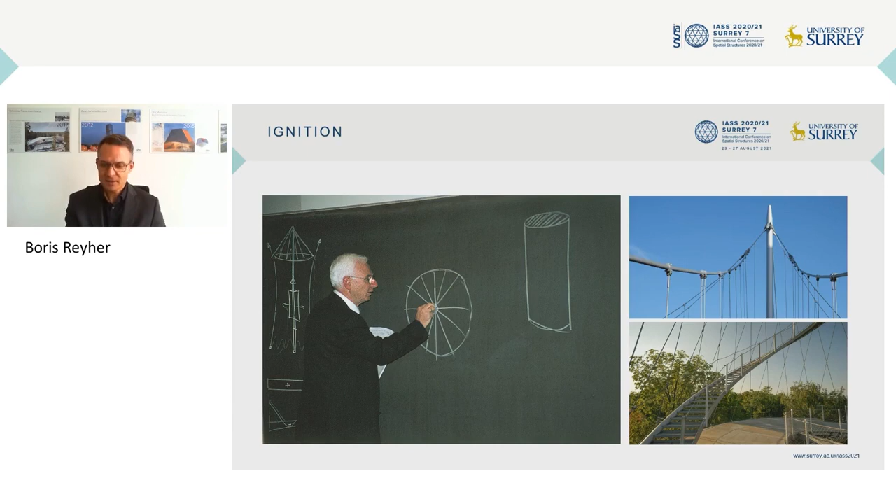And if you look at the sheer dimensions and the sheer amount of innovations and unknown solutions at the beginning of this project, that were novel concepts for structural detailing, novel ways to calculate and design such tensile structures in these unparalleled dimensions at the time, this is really breathtaking, and I think it's a very good example of, as I said, how courage and creativity can bring about great results.

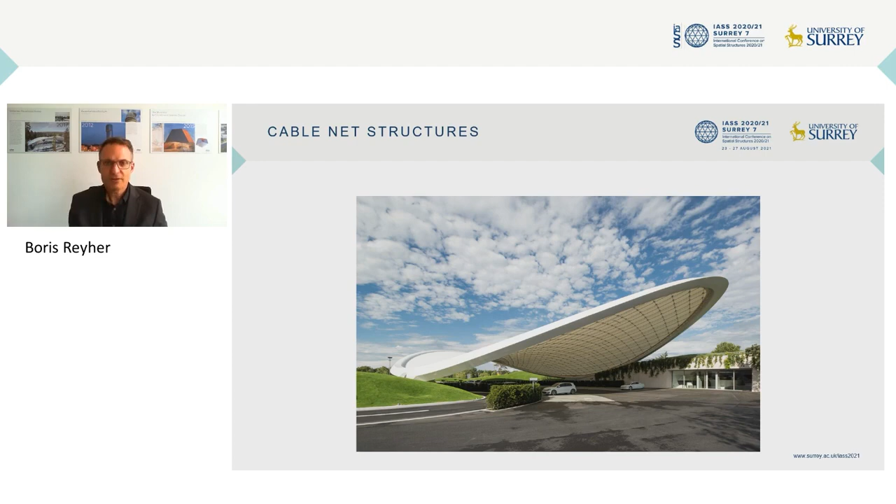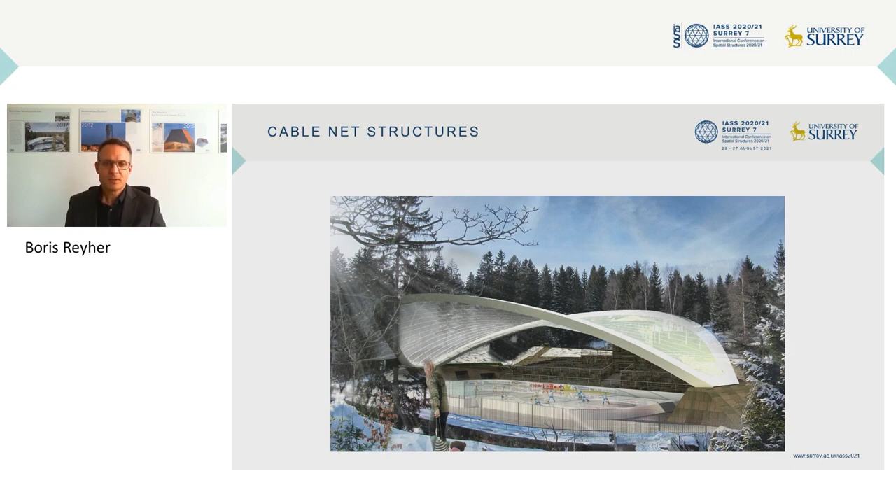And in the following year, we had the opportunity to work on a competition together with architects Graft. And here we also applied a similar principle, but with a bit bigger dimension. So here we were certainly inspired by the predecessors, by the example of the Raleigh Arena. However, the boundary conditions were a bit different here.

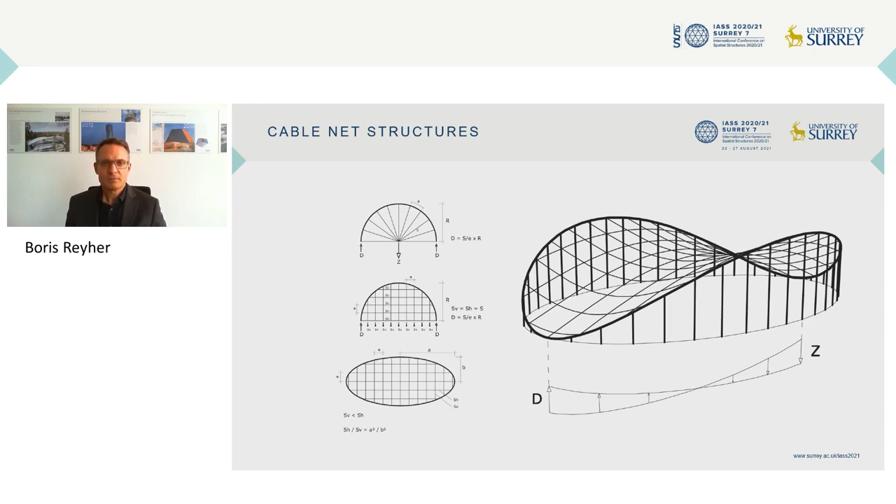So first we sat down and studied how these orthogonal cable nets work when you have different shapes of edge girders to attain a bending moment-free edge girder. And then, of course, when you go into 3 dimensions, how do the push and pull forces work if you have a continuous column around the perimeter.

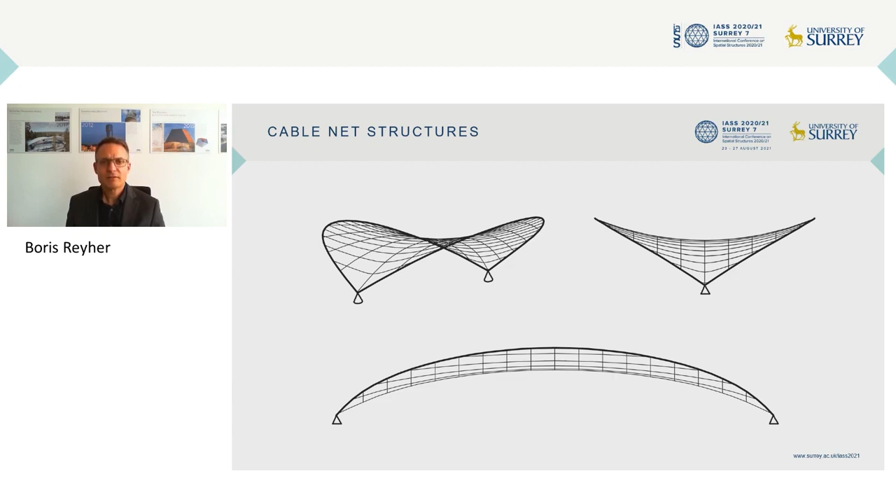But in this project, it was a bit different. We wanted to have a completely freestanding structure with only 2 supports at the ends and a span of about 80 meters. So we had to go into a bit more studies to get this all working efficiently and effectively with a bending moment-free edge girder.

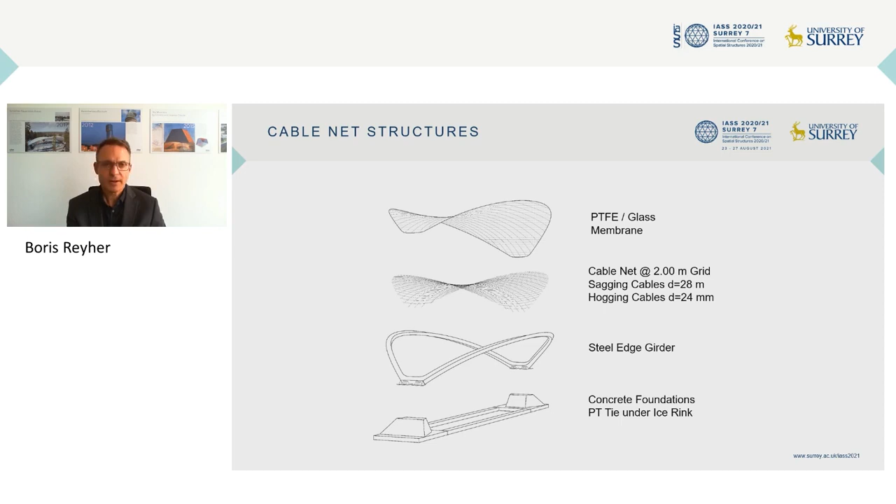And what we ended up with was the system of a cable net that was pre-stressed against a steel edge girder in a spatially curved form, and then a PTFE membrane that is basically lying on the cable net. And then underground, of course, you have some abutments and some PT ties to connect the horizontal thrust under the ground.

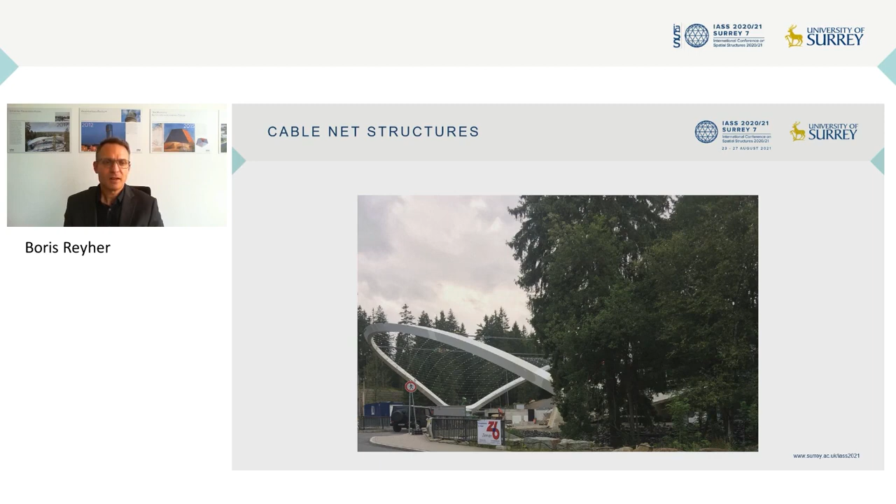So then the steel structure came up, and you can see this expressive geometric form, which is, of course, a result of the structural form finding more than architecture. And then the other thing, of course, is getting the details right to come out with a really convincing overall result. So a very clean solution also for all the little parts where, for example, all the cables are joining with the edge girder.

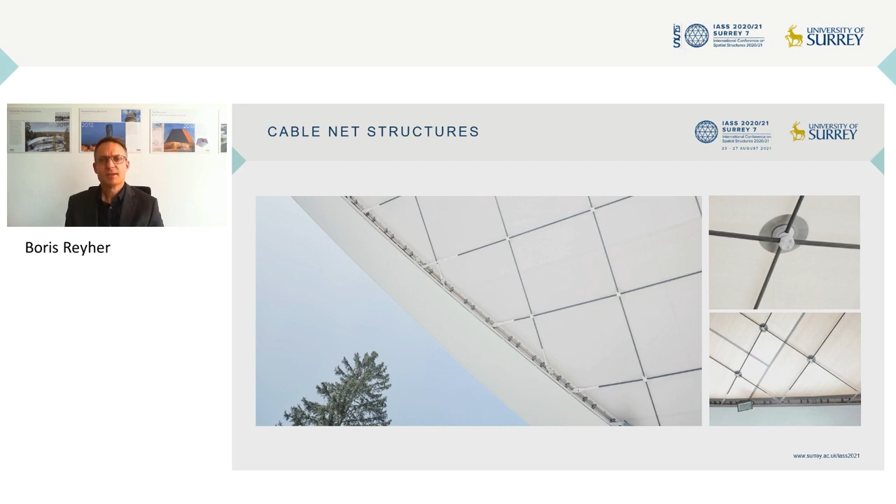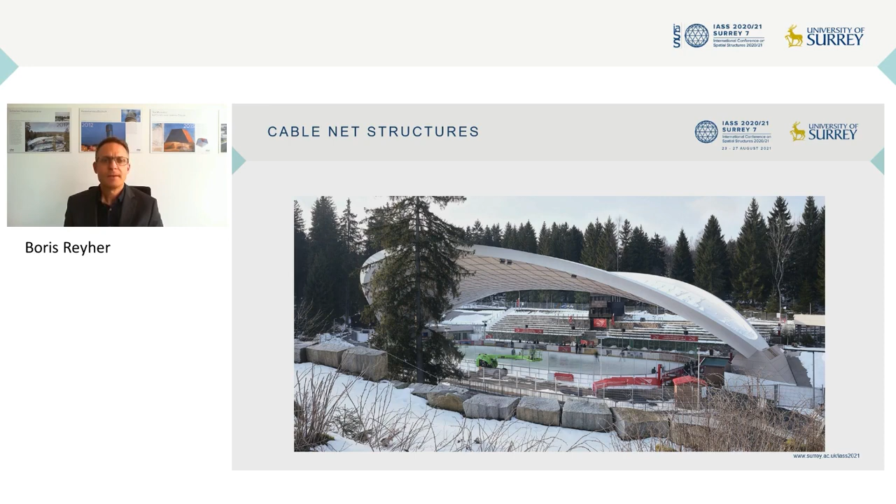A nice and clean cable node between the membrane and the cable network, and even down to the welds between the membrane patches, that they would properly align with everything else. And I think it can be said that the result is pleasant and is giving new life to the existing ice rink that it's covering. During day and during night and all around the year now, this historic ice rink location has been transformed into a venue for all sorts of sports and leisure activities.

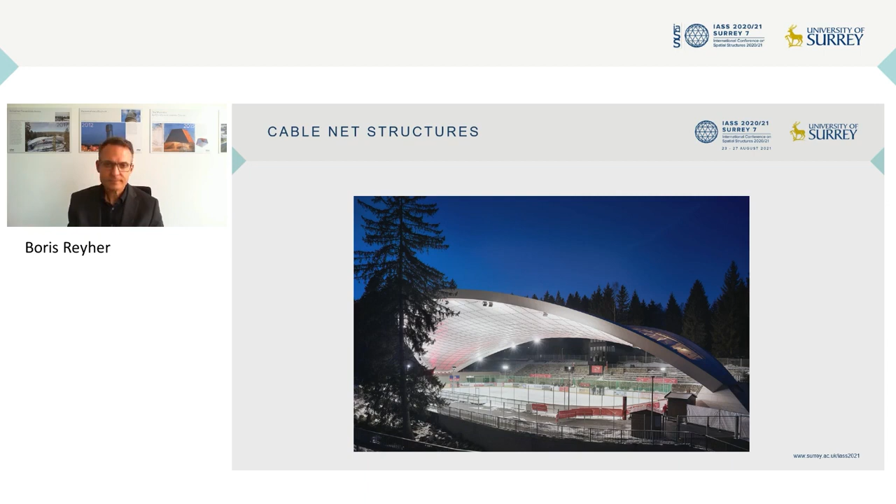Another quick example I want to give is about compression shells. And I was quite pleased yesterday when I heard Marijke Mollaert's keynote, and she was talking about how physical modeling for form finding is still important today. And this fits very well with my little presentation here of this project of a footbridge in Ditzingen in southern Germany, where we started thinking about structural form.

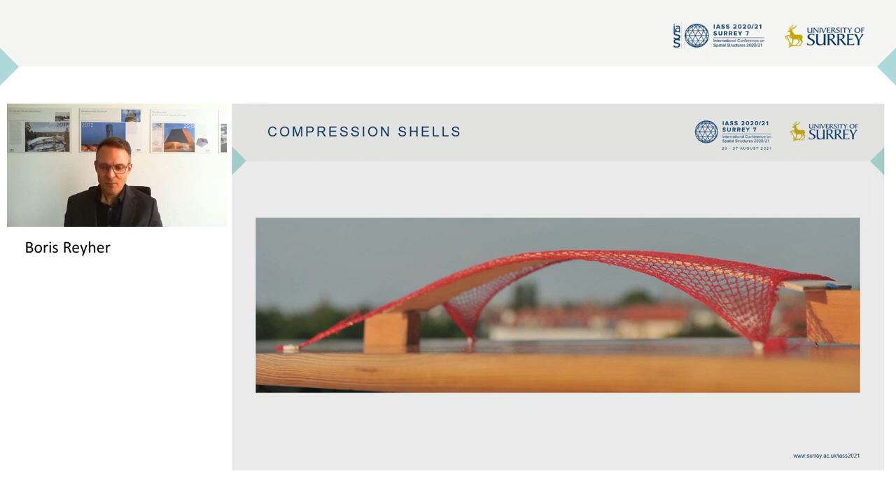And Mike Schlaich was one summer evening sitting on his terrace and playing around with this orange net, you know, this plastic net where you can buy your oranges at the supermarket. And he was, with the means that he had at his home, playing around with the form finding, actually for a very thin compression shell, which ended up a 20 millimeter stainless steel plate, doubly curved, and with some reinforcement around the edges, some stiffness.

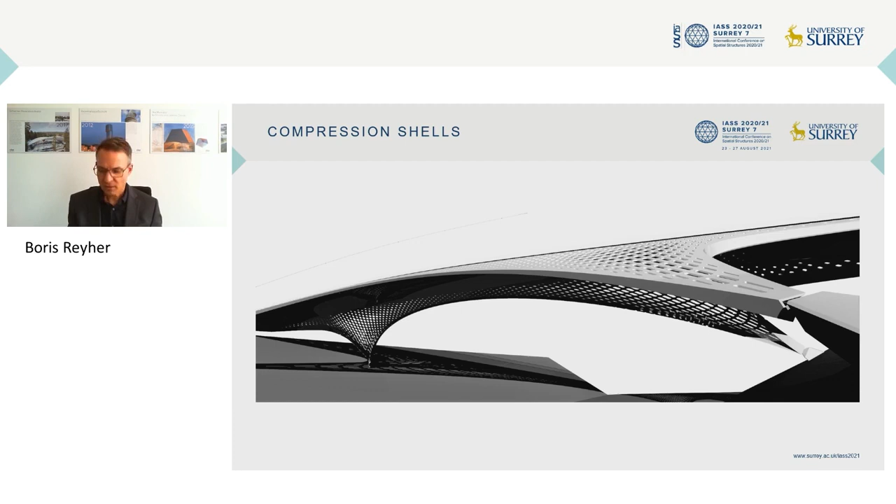And the underlying idea was to make the structure of this bridge a true shell with membrane action, but also to visualize the flow of forces and stresses in the shell by basically cutting away the non-used material, so it gets the appearance of this net that we have seen before. Excuse me. And we came out, as I said, with a 20 millimeter thick steel plate.

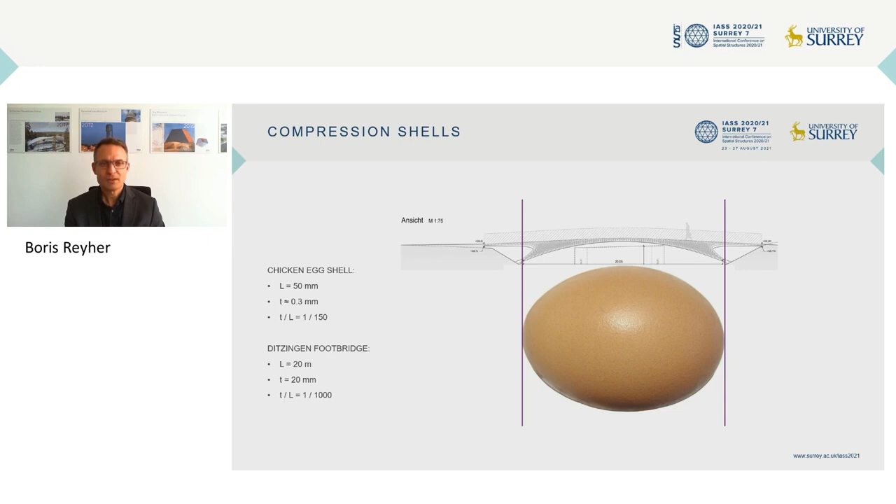And this is a small project, it's only 20 meter main span. But if you compare it with something that we think is very efficient, the shell of a chicken's egg, we're actually about 6 times thinner. So if you compare the ratio of wall thickness to length or span between a chicken egg and our footbridge, it's 150 to 1000. So I think this is kind of an example that it actually works very efficiently as a shell.

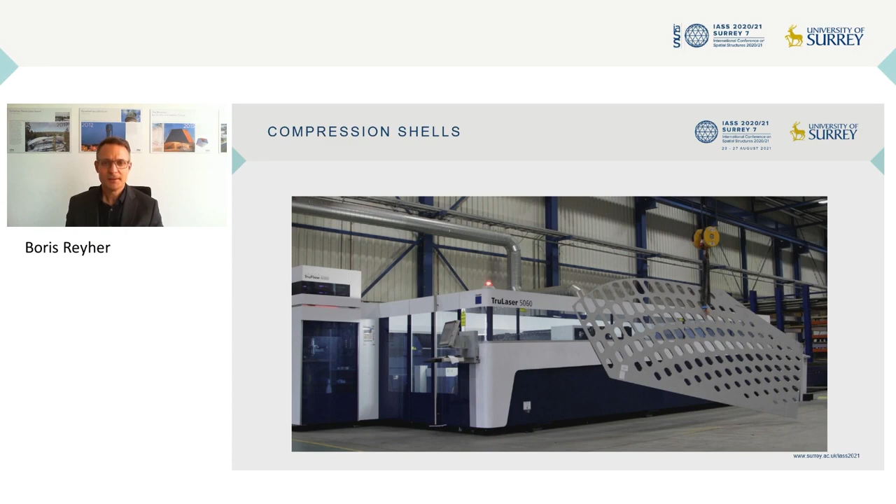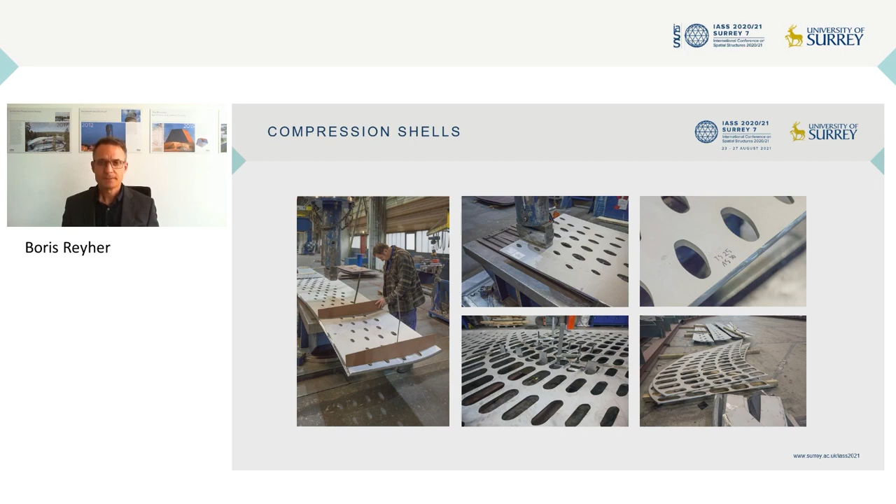Some impressions from the manufacturing process. One interesting aspect here is that the client is actually a company that makes laser cutting machines for steel plates. And so they very much liked the idea of perforating these steel plates because they could do it with their own machines. The elements were then pre-deformed into the doubly curved geometry and then assembled and welded together by some other subcontractors. Everything was pre-assembled in order to assure the fit on site. And then finally brought to site for the final assembly of the whole structure.

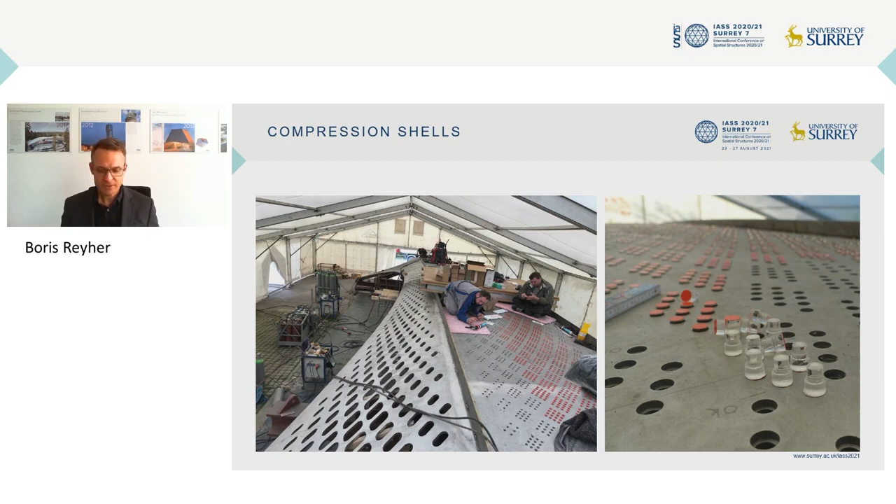And what you see in this picture, these chaps here, they had to spend a few days with very fine work, because in addition to perforating the sides of the shell, we also decided to perforate the walkway. And of course, you have to make sure that people don't get stuck in any openings in the walkway. So we decided to use a large amount of small drillings that would get closed with these glass plugs. And these two poor guys here had the job of gluing in about 17,000 glass plugs into the bridge deck in a matter of a few days. But then it was time to lift the whole structure in place over the road that it was crossing.

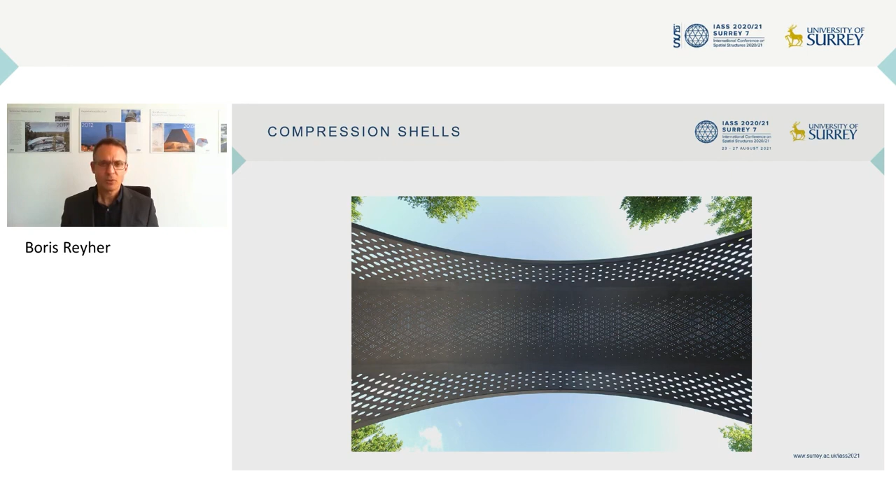And then you can see here in the underside, this perforation with the glass plugs really has an effect. So the whole appearance is quite light and quite transparent. And then also different views of the finished bridge. It also received a very highly transparent and low reflection glass parapet in order to underline the lightness of the whole design. And even at night, with a lighting concept that we also developed, it's quite an amazing view.

The sustainability of a project is not only defined by the minimization of the material usage, it can also be read in the context of what happens in the future with a project that is now designed for a certain purpose, for example, a football stadium. What happens after the event, what happens after the World Cup, for example, in 2022 in Qatar. And here's an example how we, in a design team with architects and other engineers, came up with maybe a novel approach to stadium design.

The FIFA projects for the 2022 Qatar Football Cup include this venue at a very prominent location at the waterfront of Doha, and the site is actually very valuable. So after the event, it should be redeveloped for other purposes. And we came up together with the other design team members with this scheme of saying, okay, what if we can design a stadium that's completely deployable, and then after the event can be taken apart and then be shipped somewhere else and reassembled for another life.

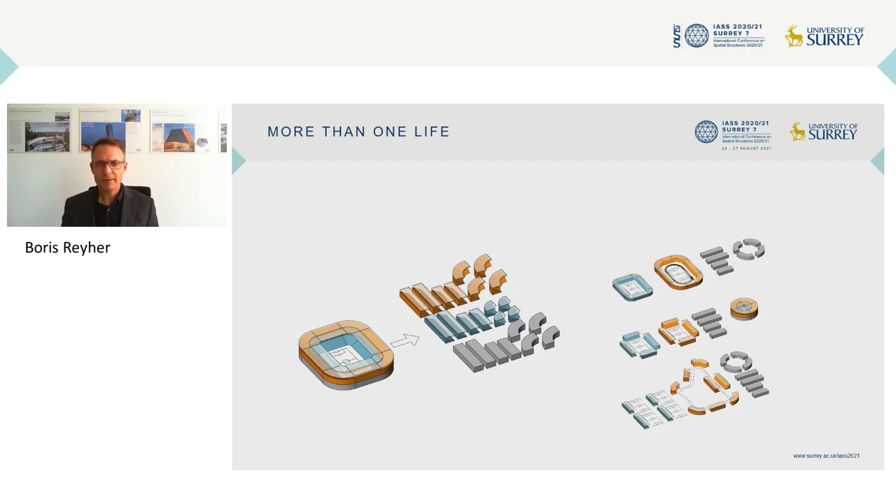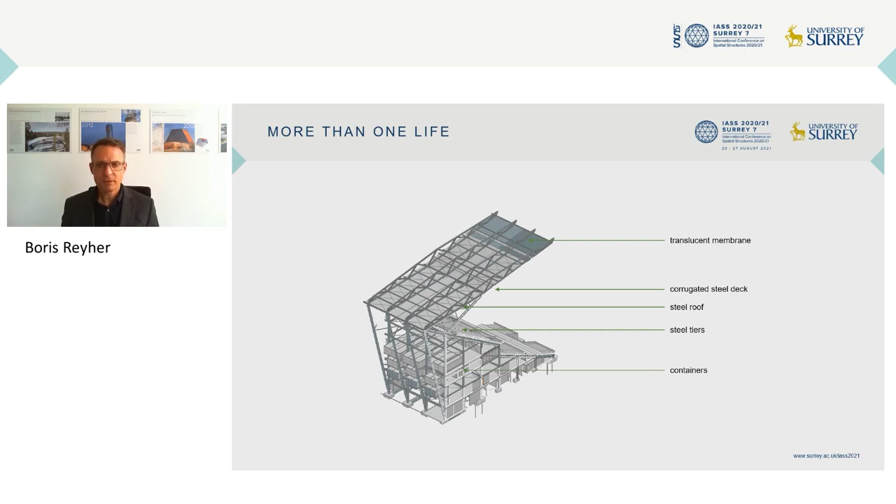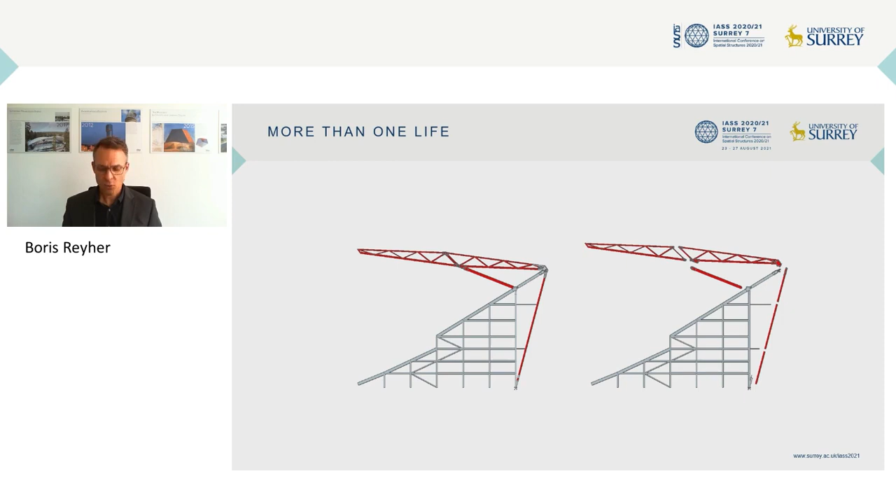So the whole design is completely modular throughout. It's completely deployable. So all the connections are bolted. There's a very high degree of repetition. There's a very strict geometric logic of the form. All the connections, of course, must be very carefully designed to be completely dismantleable. All the elements must be broken down into sizes that will later fit into containers, normal seaworthy shipping containers.

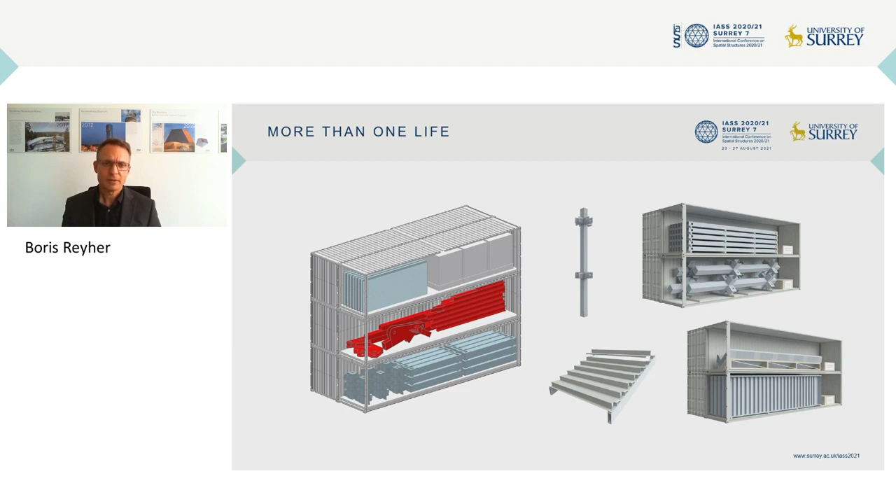And you see here, for example, the red parts here in the left side is the part of the roof truss, and all the other elements like columns and even the rakers and the seating tiers are fit into 40-foot containers for shipping. Then there are also special containers for example, ventilation units or toilets or kiosks or media facilities or changing rooms. All these functions are located in containers which can later be just basically pulled out of the structure and relocated.

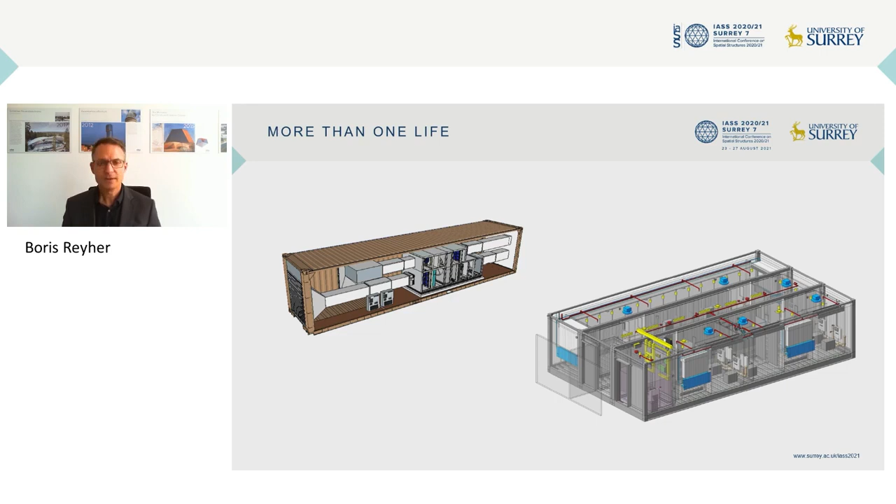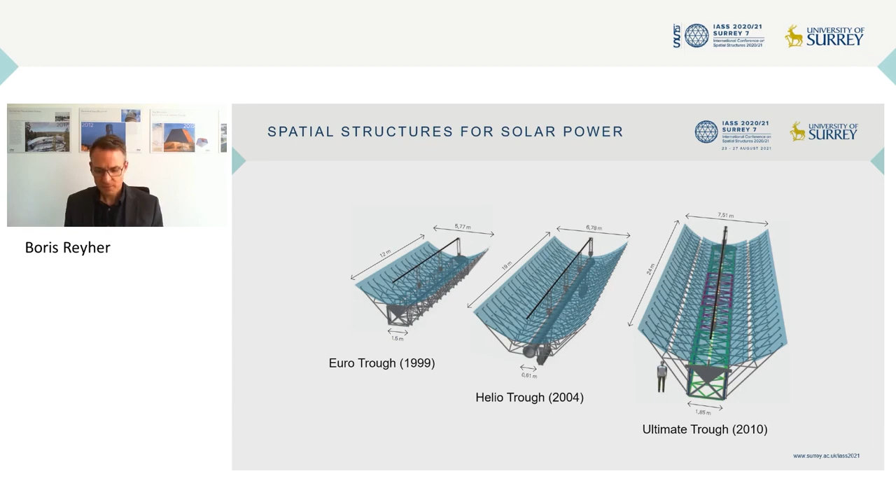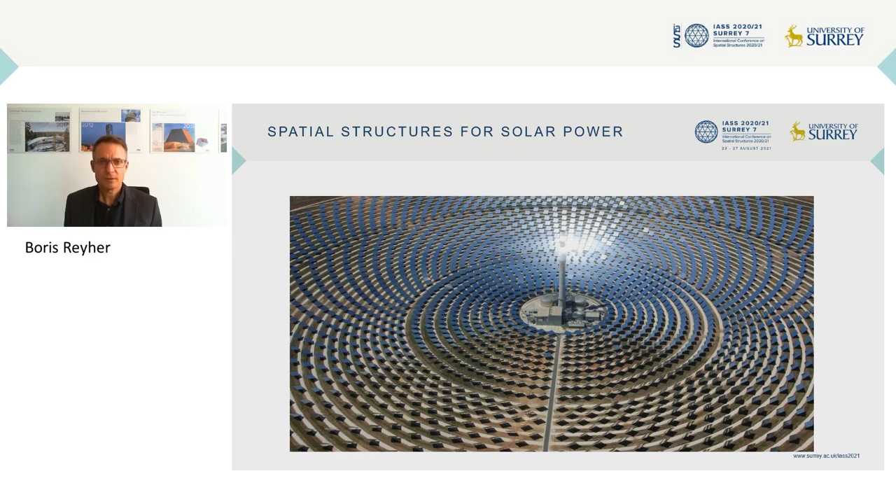And in our office, we've had a working group for the last 40 years, which has worked on developing solar thermal collectors, different generations you see here, so-called trough collectors, which focus the sunlight on a line. And then these collectors are arranged in large arrays and then connected to a steam turbine. Another form is a so-called tower type power station, where the sunlight is focused by different small mirrors on a single point at the tip of a tower. And this is basically the principle.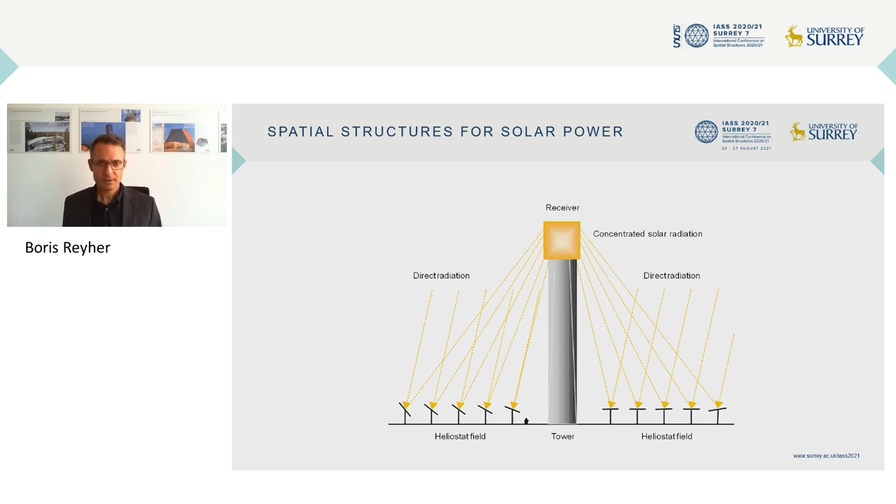So why am I telling you all this? What does this have to do with structural engineering? Well, structural engineers contribute to the development and to the construction and to the quality assurance and to the installation of these devices. And within our office, we have spent a joint effort between structural engineers, mechanical engineers, and physicists to come out with an optimized design.

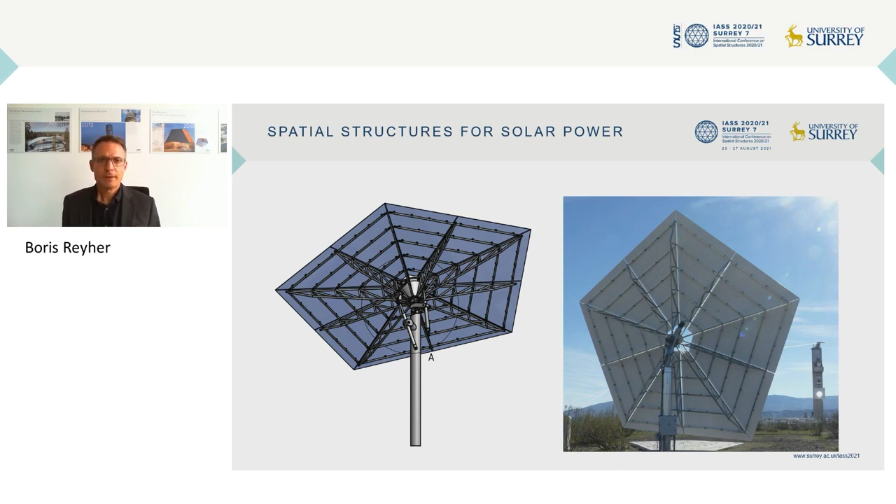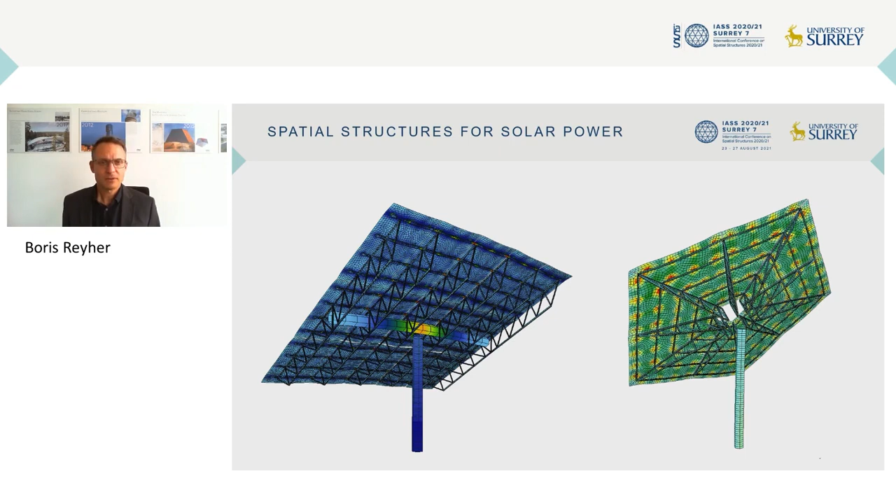Here you see this is sort of the conventional design for such a mirror for a heliostat tower type power station, and we have come out with an optimized design, which is more a radial than an orthogonal grid, in order to create more evenly distributed structural usage. So utilization of material. And we have used the very same methods and tools that we use in structural engineering of a bridge or a building. And you see here on the right hand our optimized design versus the conventional on the left. And also the pylon geometry and construction method was optimized.

Yeah, and the result is this patented collector, which now, for example, has been installed in China into a 50 megawatts power station.

Finally, when we talk about inspiration, just one final note here. It's also maybe interesting to talk about the relationship of engineering and art. Currently, we're working on a project in Paris, the wrapping of the Arc de Triomphe by the late artist Christo, who passed away unfortunately in May last year. But this is an ongoing project which is being finished at the moment. So as I speak, the substructure on the Arc is being installed, and the membrane is coming up next.

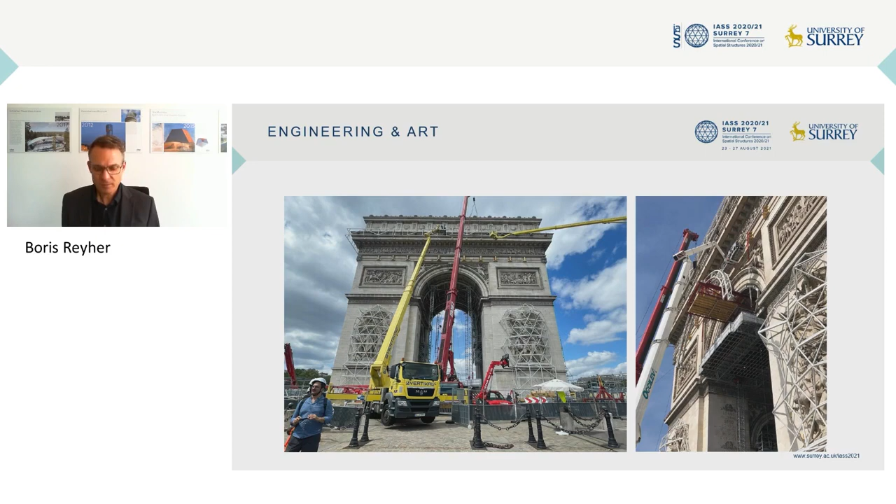So we spent in the past 2 years a lot of time preparing and engineering this project, and we're happy that it's really taking place now. So any of you who have the chance to travel to Paris between September 18 and October 3rd could enjoy this project, which is up for 2 weeks.

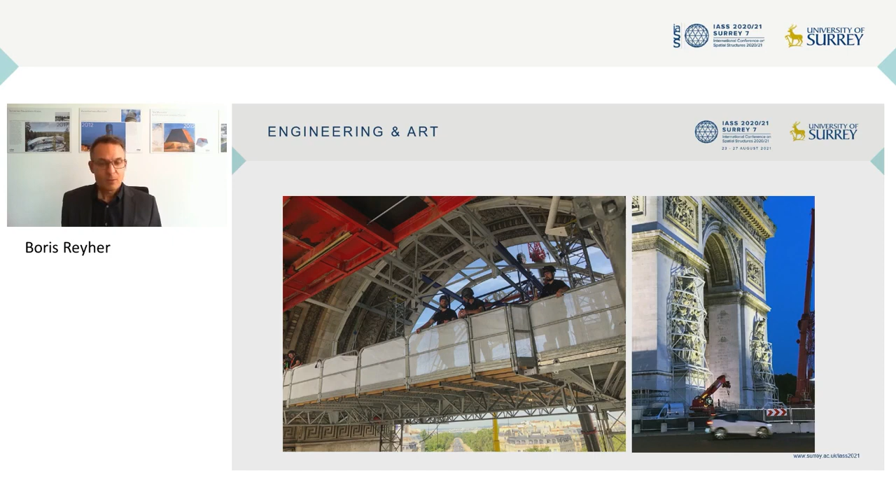Well, that concludes my presentation. I hope I could give you a bit of an insight into our work and maybe some aspects about inspiration. And thank you very much for listening.